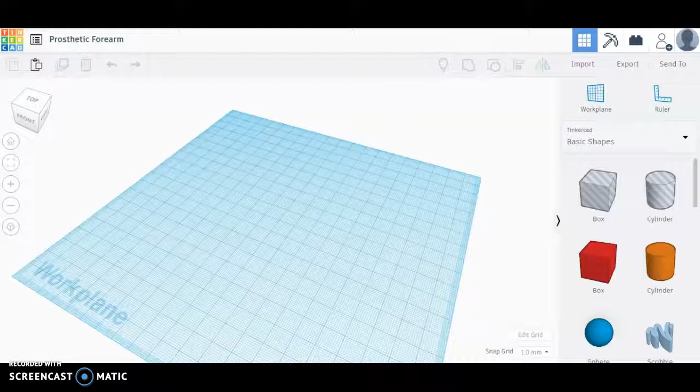This video is to show how to model the prosthetic forearm in TinkerCAD. If you've already seen the previous video on building the humerus or the upper arm, you'll know that the forearm we're working off of this upper drawing. So I will go a little faster here to make this arm, and then we're going to show you a couple other tricks along the way.

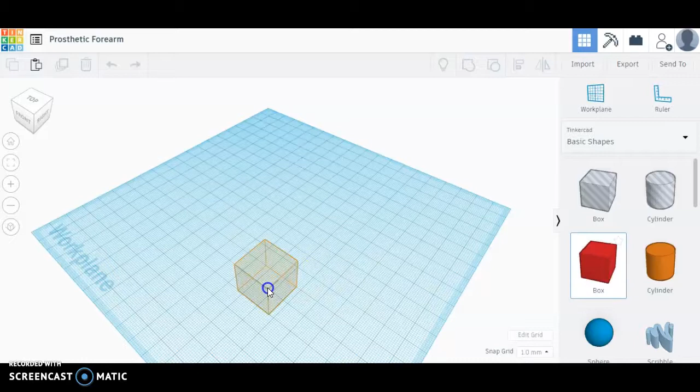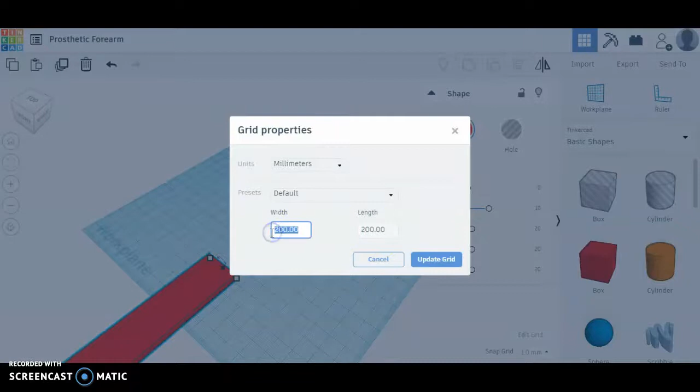So I'll start with a 235 millimeter by 25 millimeter by 4 millimeter rectangle. By 235. Hit enter to get there a little faster. Now I might want my snap grid to be something more in the 300 millimeter square, or at least a little larger. I don't think it really affects anything in the long run if it's not fitting perfectly. I can hold the shift button and rotate that around.

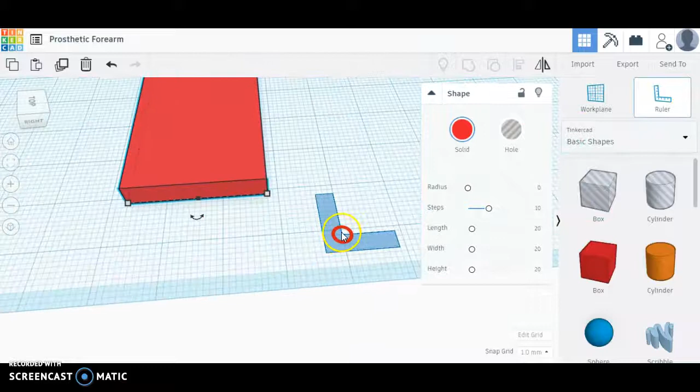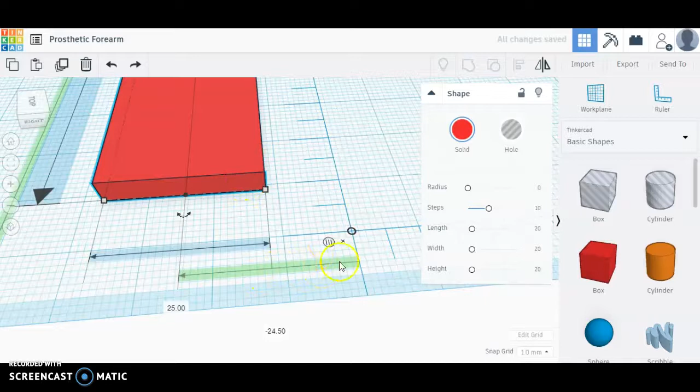Okay. Now I will drop a ruler, or I can also hit the R button as a nice shortcut for the ruler. And I'll place that on a major grid line. Use the midpoint to 0. The rectangle on that midpoint. I think I hit something other than the midpoint there. So I'm going to Control Z to undo. What I actually want to do is start by using the endpoint to 0 to the ruler. Then I'll switch to midpoint and 0 that. So here we are.

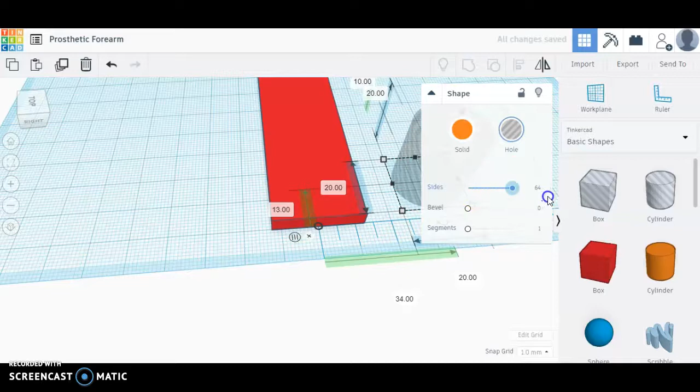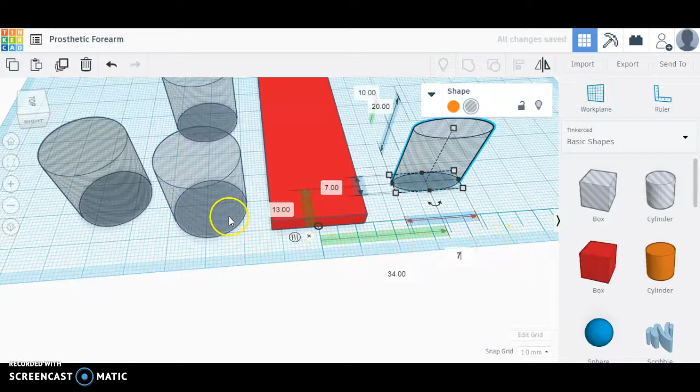Now we're going to need to add several holes, increasing the number of sides. I'll use that Alt shortcut to make some copies for what it's worth here. Okay, the two larger holes are going to be 7 millimeters by 7. And let's place, oh, we only need one. So that one is, while I'm here, a small 3.5 millimeter hole at 15 and 127. And this larger one is at 65.

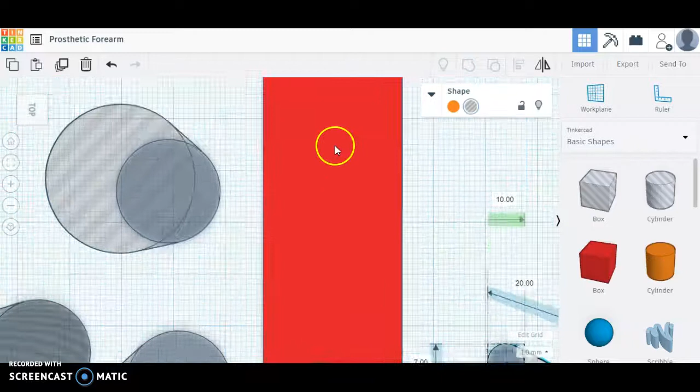So notice when I'm not on orthographic, when I'm on perspective view, you'll see the advantage of switching to flat view for these alignments. Okay, so this needs to be to the midpoint is 65 millimeters. And this needs to be 0 to center it up. Okay, I can delete one of these. I could actually delete probably 2 because I just want to make one of these 3.5 millimeters in diameter.

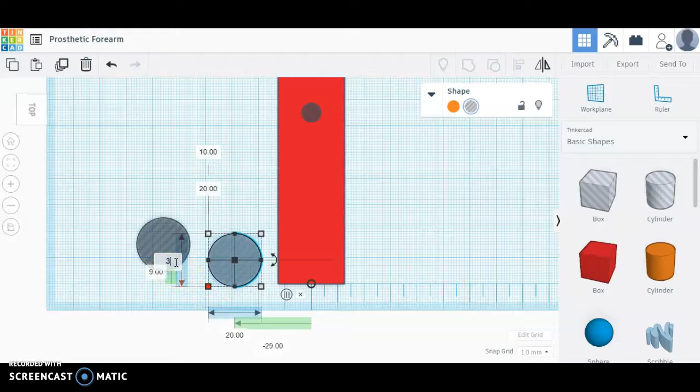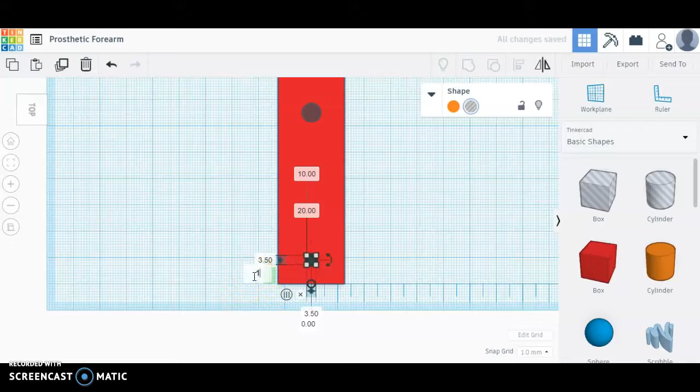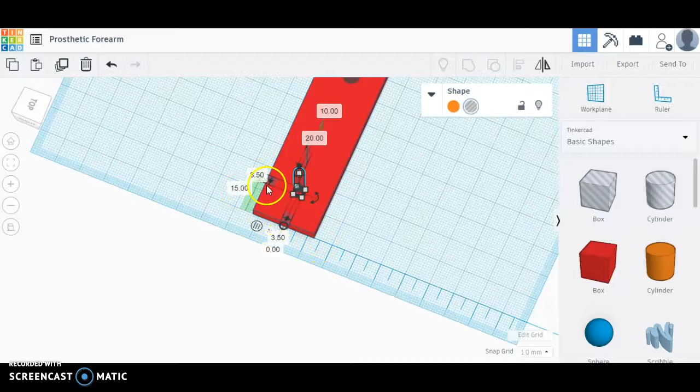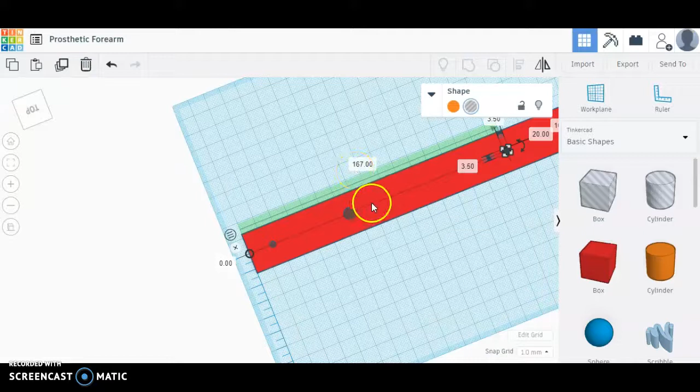So 3.5 by 3.5. I'll go ahead and delete this and rather just 0 this dimension. I think this one was 15, but I will double check that. Okay, so here we are at 15 millimeters in, 65 to the larger one, and then another one at 127. So we have this one at 15 and 0. I'm going to Control C, Control V, and I'll need to re-zero that because it did place a little offset, but this is at 167 millimeters. Okay, that should be ready to go mostly, so I'll Control A, select everything, and Control G to group it.

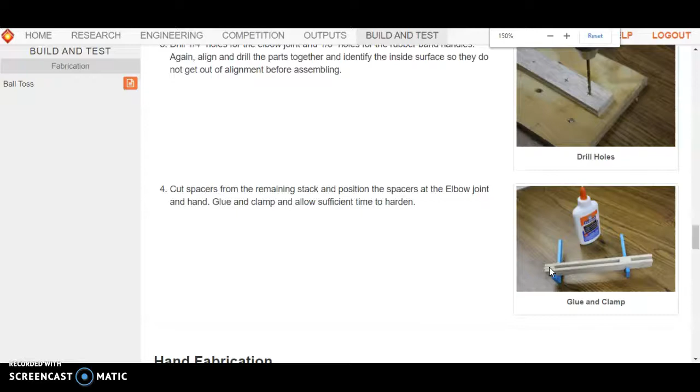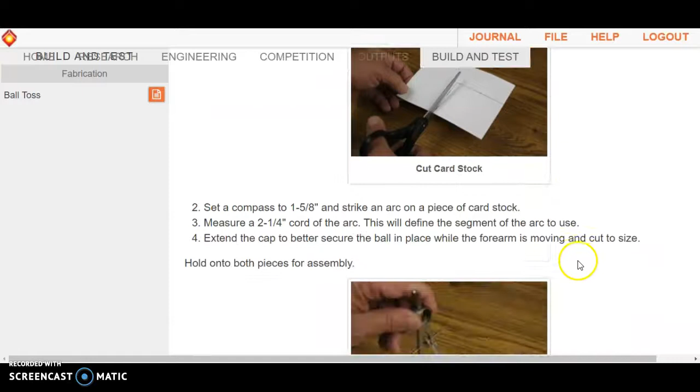Now there's another step or two in the forearm that involves gluing some things together with spacers right here. So maybe I can zoom in a little bit, see that picture better. Okay, there's no specific information given on the size of the spacer, and it's somewhat hard to tell, but I believe that one spacer is on the end that has the cardstock, and the other spacer seems to need to go right where the large 1/4-inch drill hole is. I figured that out further on in the assembly.

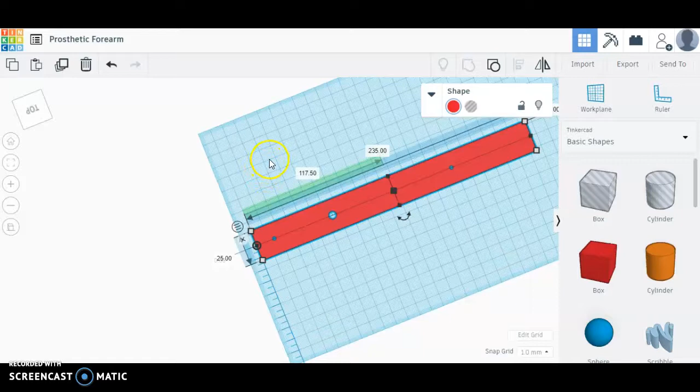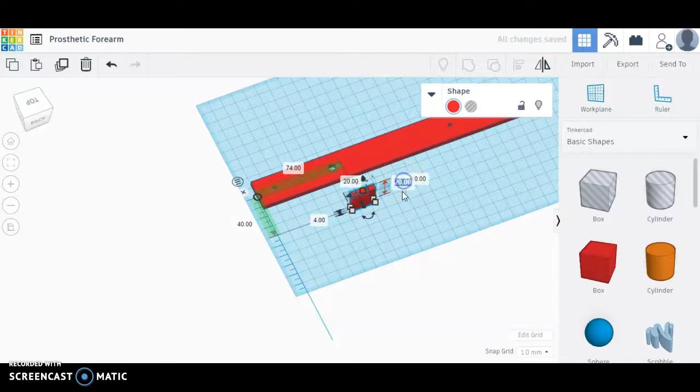So the way I may approach this, we know the spacer is 4 millimeters thick. That's a given. So I might make this 4 by 20. I think it's going to need to be 25 millimeters tall to match up with the height of the others. That dimension I meant to be 20. This dimension here, just to clarify, needs to be 25. Okay, I will drop that on the work plane. Probably just get the ruler out of here because that's just creating more information than we need.

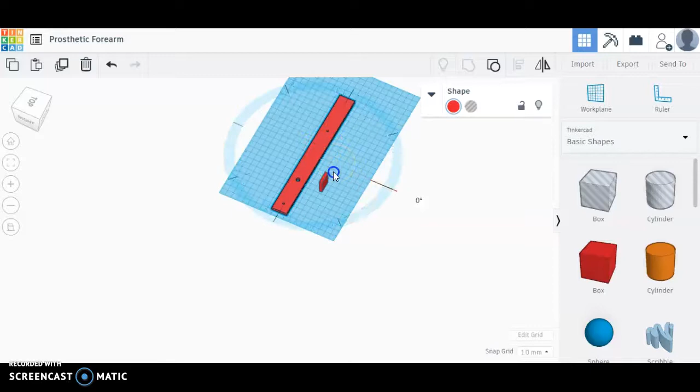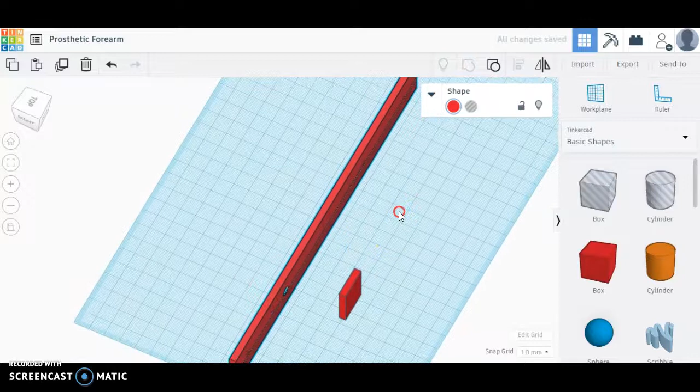I think I need to rotate this way. Nope. I need to rotate this rotation to 90 degrees. Holding the shift button so that I'm going in larger increments. Now we'll notice again that rotation took it off the work plane, so D for drop. Now to add these spacers, I believe I need one spacer lined up more or less with that hole. I might almost be okay with just doing that visually, and the other spacer lined up with this end.

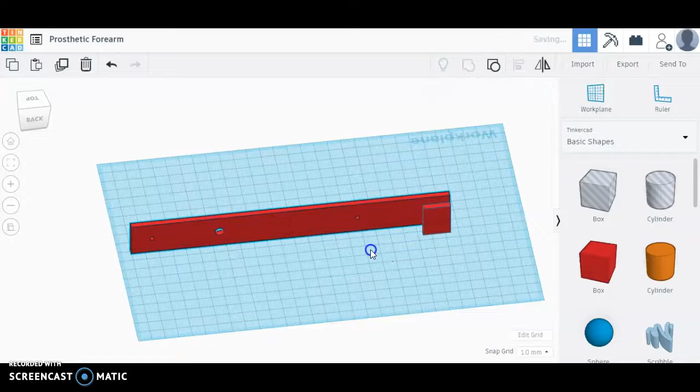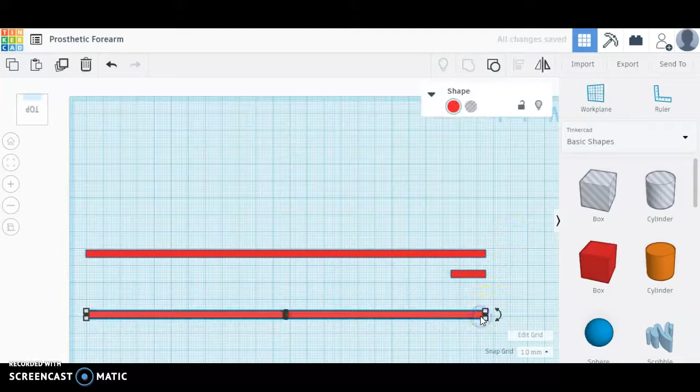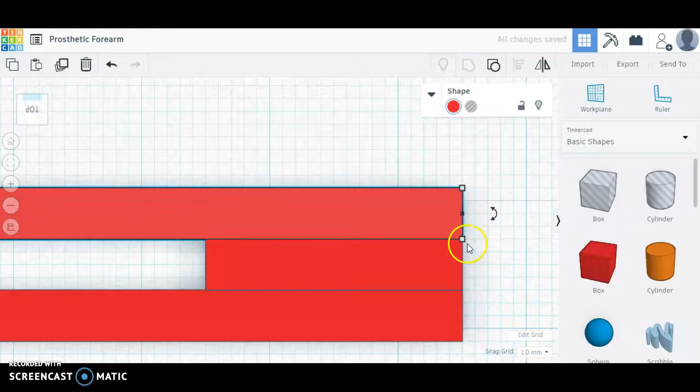Okay, so I'm going to hold Alt and make a copy here. All right, and I'm going to select all of these items and use my L for align tool to line up their ends together. Try top view here. Now I could use a ruler or something. I think I will just visually zoom in about as far as I can here to bring these pieces together. Again, my snap is set to 1 millimeter, so I can feel rather confident that these things are lined up as I want them.

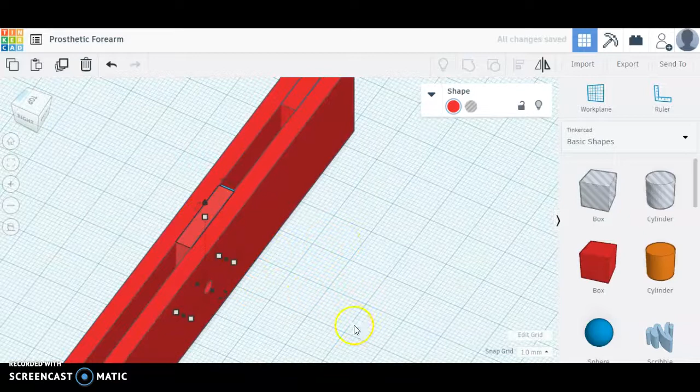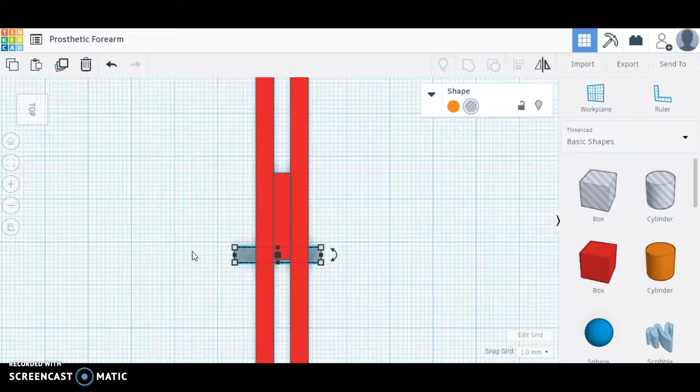The next step is probably going to be to hold the Alt button. Now notice this doesn't always work on Chromebooks, I've noticed. So you might be kind of stuck doing the Control C, Control V. Another little trick here. What we're going to do is take this piece and ungroup it. That's going to bring back that hole, which I should be able to select and just bump it over so it goes through everything. Then I'll move this piece, this spacer piece down.

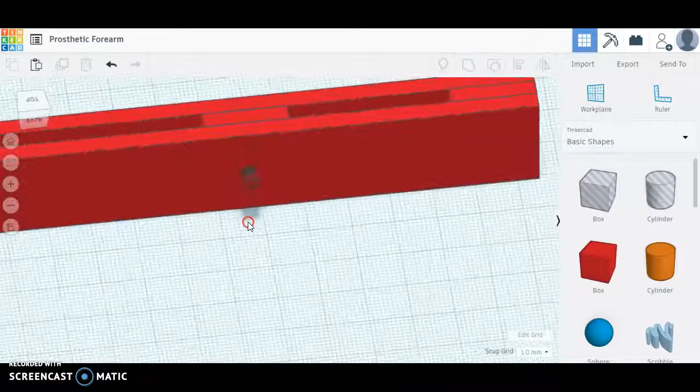I don't think things have to be perfect. I know that with that 1 millimeter snap, that's not going to be perfect in the center, but I think it certainly serves its purpose. I could either make this a 1.5 millimeter snap or use the ruler to measure some of these things. Last step here is going to be to select everything and group everything, which will put a hole in that spacer.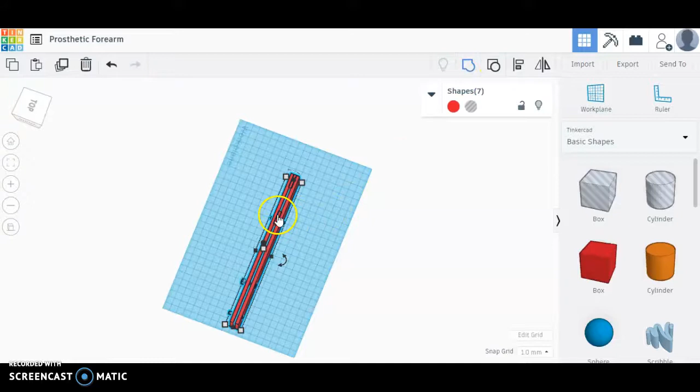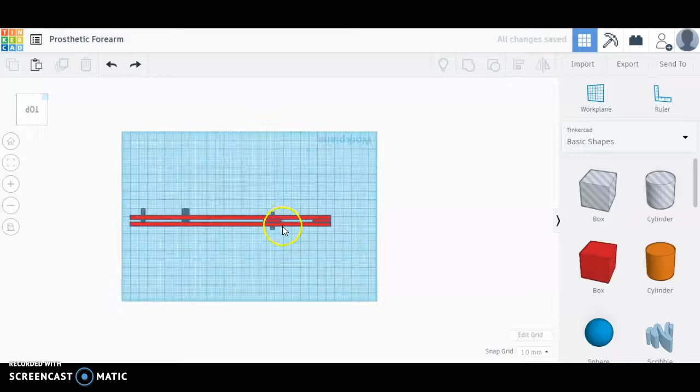I actually think I did this wrong. This spacer was supposed to not have this hole in it, but rather this one. So I could ungroup everything, or I can just Control Z, top view, and it was supposed to be this larger hole going through this spacer, so I just need to move that down.

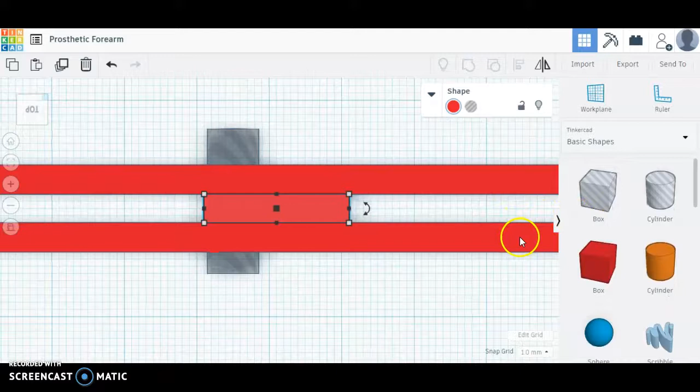Okay, Control A, Control G. And I think we have our final piece ready for 3D printing and ultimately for assembly. Yep, see that both of these holes are aligned and go all the way through, and our spacers on the end.